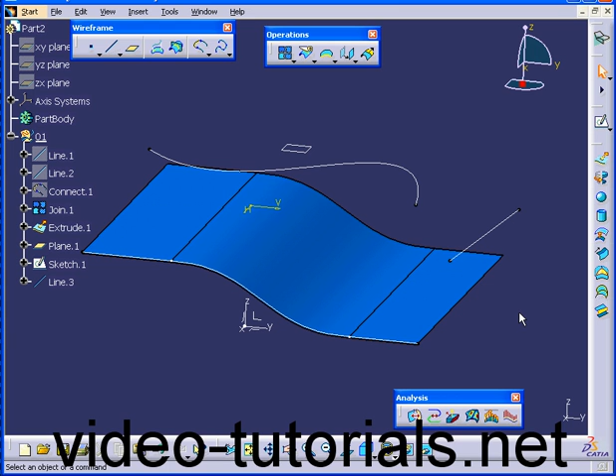Welcome to our tutorial on the projection command. Let's start by activating the projection command and exploring its definition dialog window. Under projection type, we've got two options, normal and along a direction.

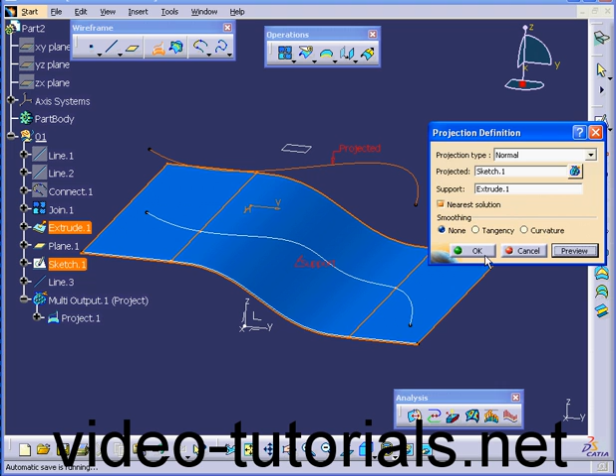Let's select normal. In the projected selection box, we're going to select this curve. Under support, let's select this surface. Click Preview and OK. Now let's run the Curve Connect checker.

Let's start from the original curve. As you see, we have no problems with either tangency or curvature. Basically, it's a single continuous line.

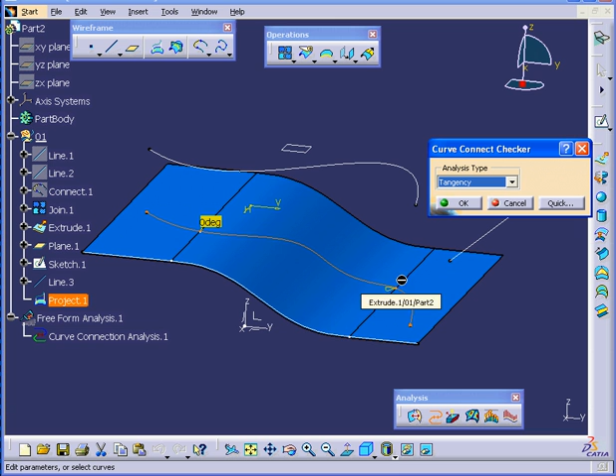But if I select the projected line we just created, we obviously have some problems here. The curvature discontinuity is 51% at this point. The tangency seems to be okay. Let's cancel out of the Curve Connect checker.

Let's double-click on Project.1. In the Smoothing Definition area, we've got three options: None, Tangency, and Curvature. Let's select Curvature. Deviation we'll leave at the 0.001 and click OK.

Let's run the analysis again. Curvature first. Select our curve. Both look good now. Tangency as well looks good. Let's see, perhaps we can enhance our spline even more.

Let's check the 3D smoothing option this time. This type of smoothing is calculated without specifying any particular surfaces. Let's click OK, and then run the Curve Connect checker analysis.

I'm going to select this line. As you see, we now have one continuous line. Let's cancel out of our Curve Connect checker analysis. The smoothing option doesn't always work. You actually need to have pretty smooth surfaces to begin with.

I'm going to run another analysis. I'll select this surface. You see here, the surface is actually quite smooth to begin with. Let's cancel out of this analysis for now. Let's make some changes. Double-click on Connect.1.

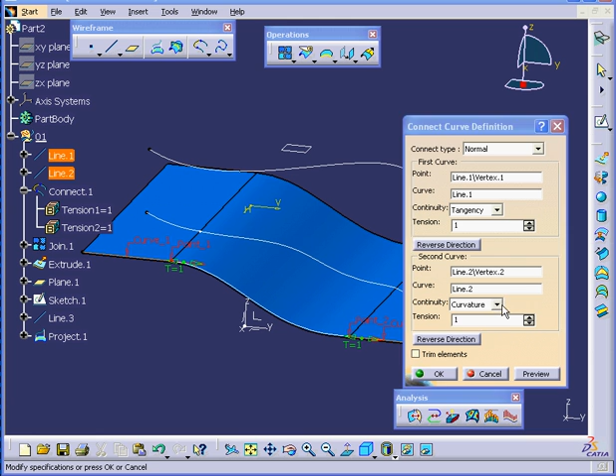You see that between this point and this point, we have curvature continuity. I'm going to change this to tangency and click OK. Now let's run the porcupine curvature analysis on this surface again. You can see that we don't have smooth transitions here or here.

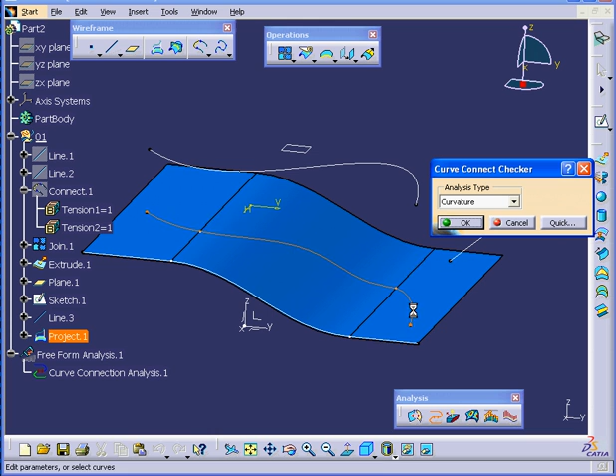Let's go check how our line is doing. Select the curve. Surely enough, we have some problems now with curvature continuity as well as with the tangency.

There are 2 points that I'm trying to illustrate here. Our example shows that continuity can be lost during the projection process. Let's cancel out of the Curve Connect checker for now.

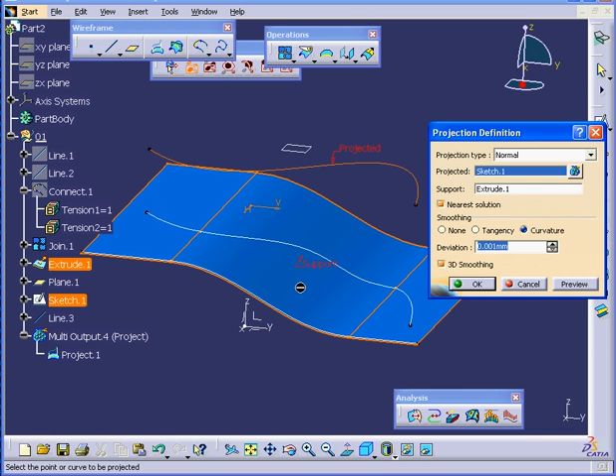When we implement the smoothing function, it doesn't always correct the problem. Basically, the underlying or support surface needs to be smooth to start with. Let's click OK. And this concludes our tutorial on the projection tool.